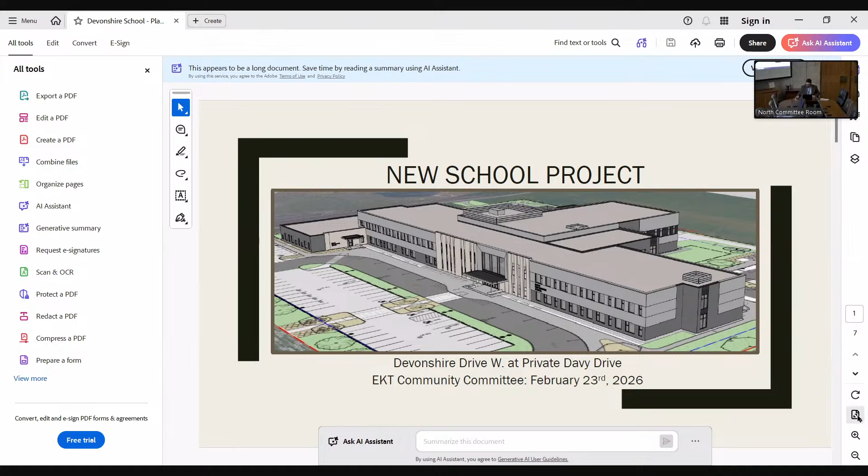Good morning. Thanks to the committee for allowing me to speak. My name is Jeff Pratt. I'm a planner with Landmark Planning and Design, 298 Waterfront Drive here in Winnipeg. I'm here as part of a larger project team to do plan approval for a new school at the corner of Devonshire Drive West and Private Davy Drive. I'll set things up a little bit of background, and then there are representatives from the design professionals here who can speak in detail to the plans and answer any questions the committee may have.

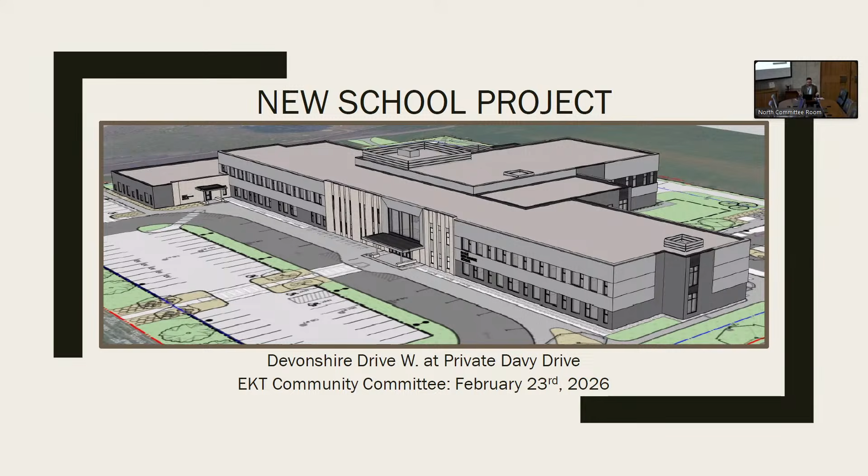As part of this larger project team, the province of Manitoba is the key proponent. The River East Transcona School Division will be running the school when it is constructed. Prairie Architects are the building architects. HTFC Planning and Design are the landscape architects. At Landmark, we're primarily responsible for the conditional use, which has already been obtained for the site. KGS and WSP have both provided engineering input into the design process.

So to show the site context, we're at the northeast corner of Private Davy Drive and Devonshire Drive West. The site has residential multifamily small zoning. It's bordered on two sides by a public reserve area and then streets on the other two sides. Back in December of 2025, we obtained a conditional use for the site to allow for a public school to be put there. Plan approval was a condition.

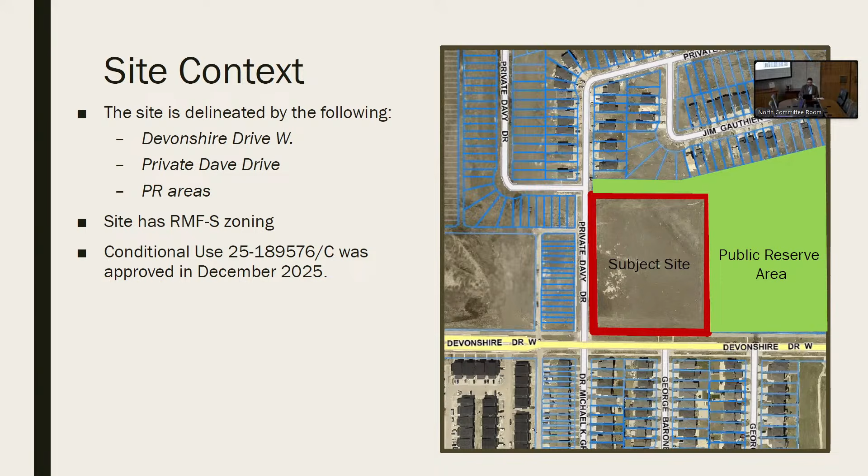To show some context, this site has generally been shown as a potential school site in the secondary plan dating all the way back to 2006, the Transcona West Area Structure Plan. This site was created in 2013 by subdivision and rezoning as part of the larger development area that created all the lots, blocks, and streets in this neighborhood. So it's been sitting vacant for about a decade.

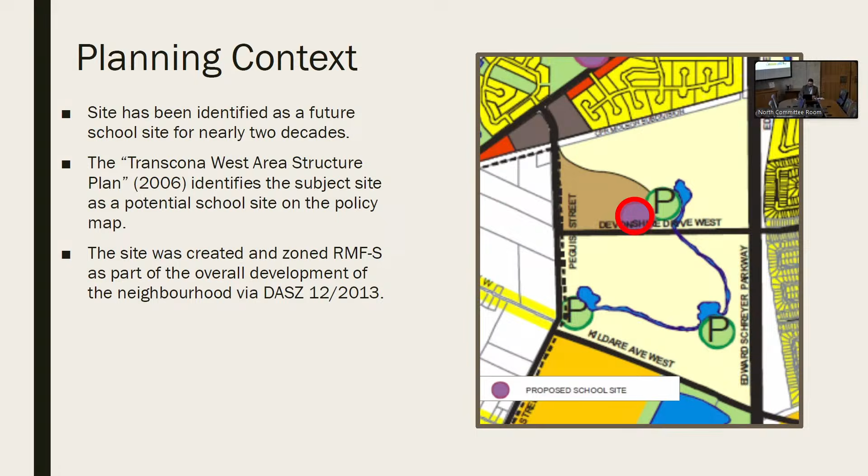The school is projected to have 800 students, 75 faculty, and 9 additional staff. We exceed all of the parking and landscaping requirements per the zoning bylaw. 41 parking stalls would be required; there are 61 provided for the school, 7 required and 18 provided for the daycare. Bike parking is provided in excess of the zoning bylaw. There are 13 parent drop-off spaces.

The design team is well aware that the big morning and afternoon rushes are important, and as much as possible on the site that's been accommodated. Bruce can speak to the landscaping in more detail if required, but all of the requirements are exceeded. The child care center is projected to have 104 children and 21 staff.

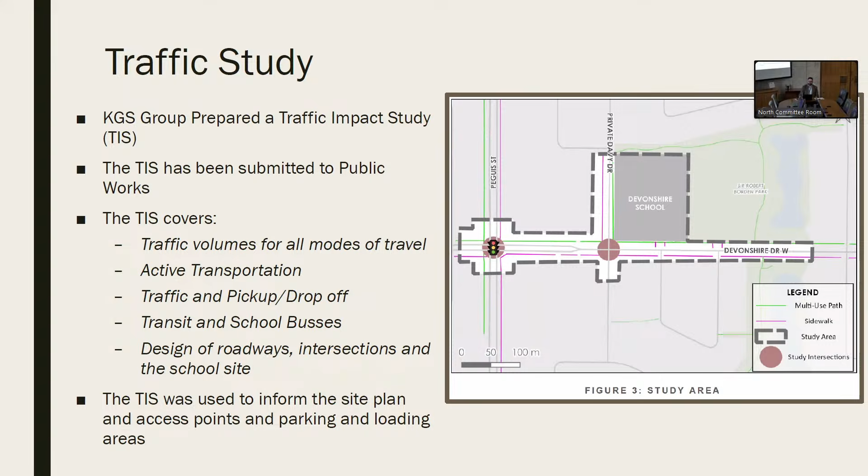There was a traffic study performed by KGS that helped inform the site design and traffic flow on the site. There will be ongoing discussion with Public Works about dedicated drop-off spots and any parking restrictions that may be required, all informed by a professionally prepared traffic study. So that's the background. I can step away and hand it over to the design professionals, who are the real meat and potatoes of what we're here to talk about today.

So I'll walk you through the site plan that Jeff kind of teed up here. The overall site is 4.75 acres. As Jeff mentioned, there's a city park here to the right - it's Sir Robert Borden Park. There's an existing playground right here, and also a retention pond over here.

There's a network of paths around the north side of the site, along the east, and active transportation paths - 8-foot wide asphalt path on the south side and also on the west side here. The primary entrance to the school is on the west side on Private Davy Drive, with one-way traffic entering this side here, and parent drop off along this side.

As Jeff mentioned, we have 13 stalls. The minimum required is 5, so we're exceeding that demand there. Understanding that pickup and drop off are important times of the day.

So we have a generous drop off all along this loop here, with a principal connecting sidewalk along here. This will be a raised tabletop connection, which has a traffic calming effect to slow drivers down, and gives good sight lines for coming to the main entrance to the school, which is right here.

We're continuing around counterclockwise, exiting the school here. Then the dedicated daycare zone for parking is this area over here. The daycare wing is this area of the school, with its principal entrance here. The daycare itself has a dedicated play yard.

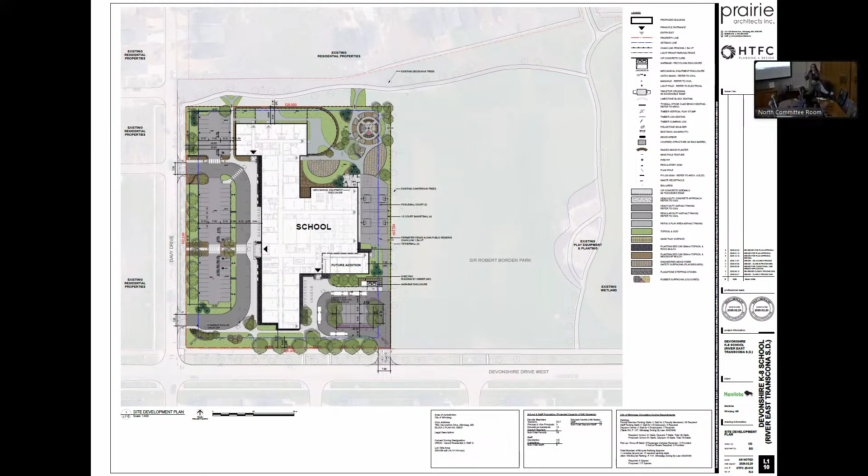Hi everyone, my name is Lindsay Oster. I'm a principal architect with Prairie Architects. We are the prime consultant on this 4-school bundle, which Jeff and Bruce both alluded to, as this school is part of a larger package. I just wanted to maybe address some of the capacity questions that were raised earlier.

This is a school designed for a core capacity of 800 students, but its initial opening capacity currently is targeting 675, which has been quite typical over the last number of years for school designs. I was checking some of the other ones - Amber Trails Community School, completed a number of years ago, I think opened in 2015, with Seven Oaks School Division, had a very similar opening capacity with a core capacity for 800 students.

And also the integrated approach to having daycares integrated into schools has been quite consistent for a number of years now. Really, the overall intent is the school as the heart of a community. For River East Transcona, this is both the school community but also the heart of the community as a whole - so a very integrated design, as Bruce has alluded to, with the park nearby.

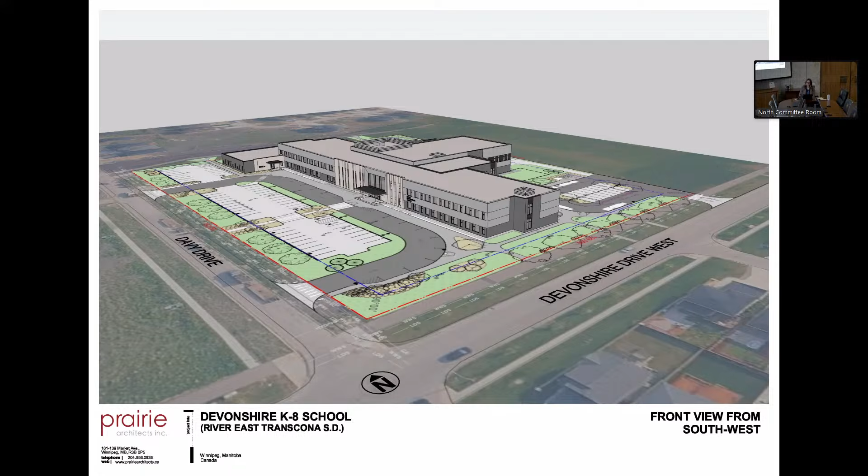The school fronts Private Davy Drive with the drop off you can see here from the view from the corner of Private Davy Drive and Devonshire Drive West. This is the view from Devonshire Drive West with the park to the right, so you can see the bus loop in the foreground with some parking in the center.

The location of the 6th classroom addition, to get it to the capacity of 800 students we were talking about, is strategically located here at the back with easier construction site access - but again, a very tight site, so consideration was given there. You can see the dashed line on the green rendering here to show where that addition would be.

So is it being built for 675 on day one or 800? Currently we are at just past Class B, 66% design drawings, and we're developing the drawings with the addition. I believe a decision on whether the addition is going to go ahead as part of the initial construction is forthcoming within the next number of weeks.

We're certainly proceeding as though it will, because it's a lot easier, of course, both from a constructability standpoint and from a budget standpoint, to build it now. So I think that is certainly the school division's preference - they have an immense need within their community to accommodate students, and this is something all parties are working collaboratively toward.

The schools are all designed with sustainability in mind, targeting high levels with LEED gold certification as the target, but LEED silver as the minimum under the provincial mandate. The schools are all built with durability in mind, so in all of these views you can see materiality on the schools - masonry clad at low levels where in contact with people, with some metal cladding above the main floor level.

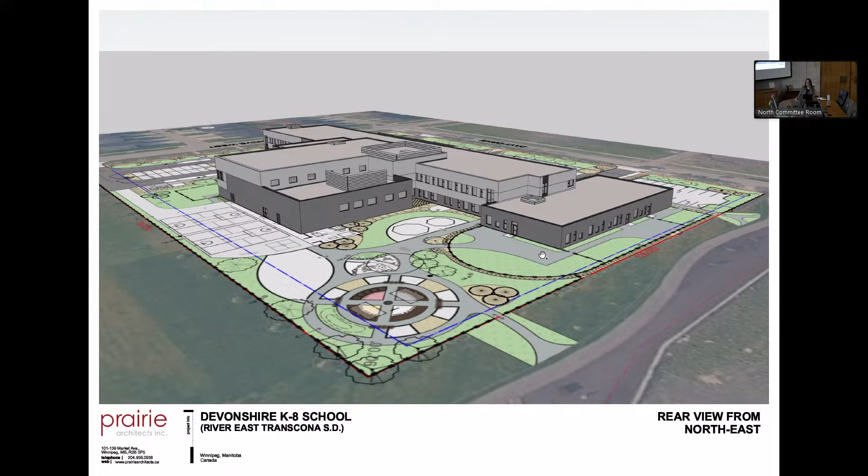So this is just a view from the corner of the public reserve on both sides, where you can see that outdoor learning environment that Bruce was speaking to, and the play yards in the back with the fence for the childcare components. And then back to the front corner on Private Davy Drive from the north.

I also have plans that I can go through, but I did want to give a very high level overview and be here to answer any questions that you may have.

How many elevators are there? One elevator. And so this package of schools has been designed as a standardized core with the intent that this standardized core could be used on future school projects.

So a concerted effort to locate all of the community accessible spaces in the heart of the school. The library and the student services suite, which is very important from the perspective of accessibility, is front and center when you walk in through the main entry, just directly to your left. The administration and MPR space opens into the gymnasium, so there is really nice and easy access for after hours use for community as well.

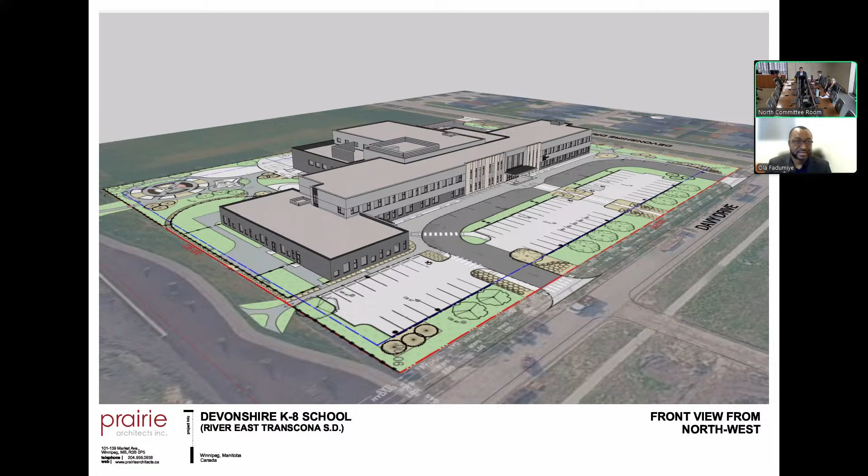Good morning, everyone. Yes, my name is Ola Fadumiye, Portfolio Manager from Capital Projects Planning and Delivery Branch in the Department of Public Service Delivery.

And I'm here with Uma Olugu. I'm just here to support the project team and to inform that we continuously engage with the school division to ensure that these schools, and particularly River East Transcona, Devonshire site, is delivered to the community.

Okay, thank you. I guess my one question is, at one point I had thought I had heard that Councillor Wyatt, who's the councillor for Transcona, is not here with us this morning, but he didn't ask us to hold us back, so we're going to move forward with this expeditiously to help this project keep moving forward.

My one question was, I had thought at one point they were looking at a school site at Ravelston and Peguis. Is the new site now Devonshire, or is there a separate school being still considered for Ravelston and Peguis, either as a high school or the DSFM?

DSFM. Yeah, currently this is the K-8 school at the moment as part of the first bundle, the Devonshire site. Okay. Is the other one still being held in reserve for another school? Yes.

It's part of the 11. I will have to confirm that, but that's not part of the first bundle at the moment. Yeah, the school division may have more information. I know they're registered in delegation too. I can ask them. Okay, thank you. Yes. All right.